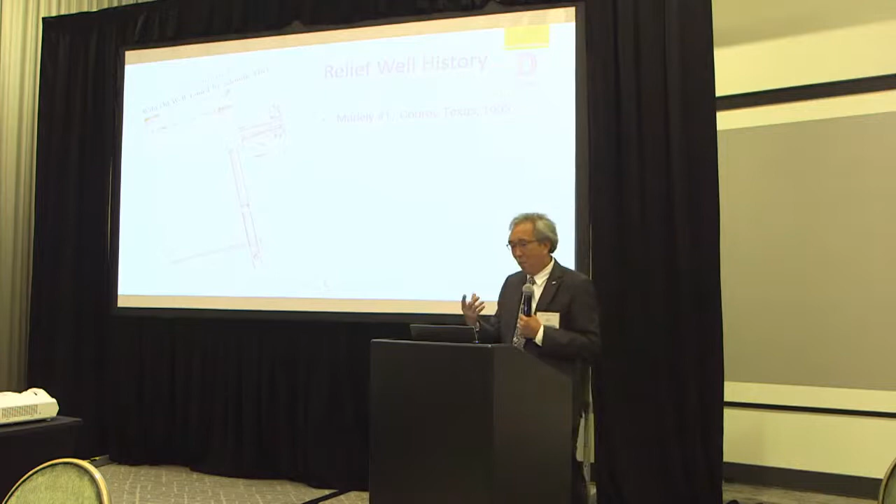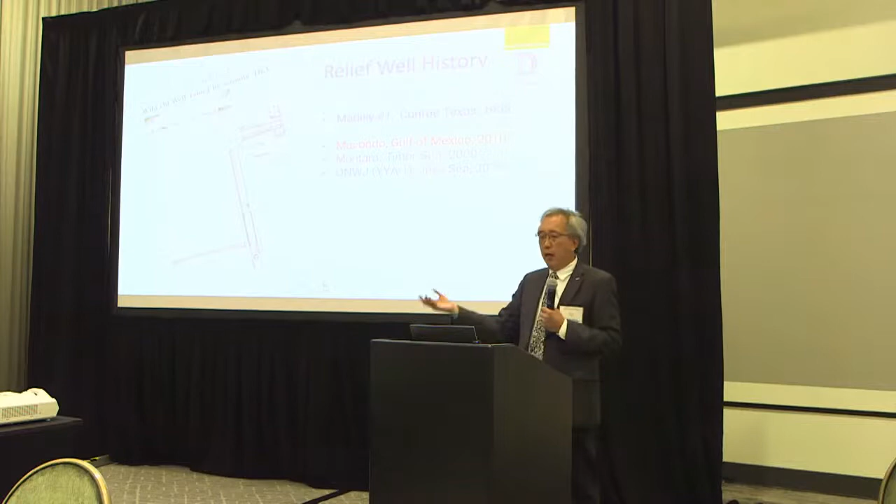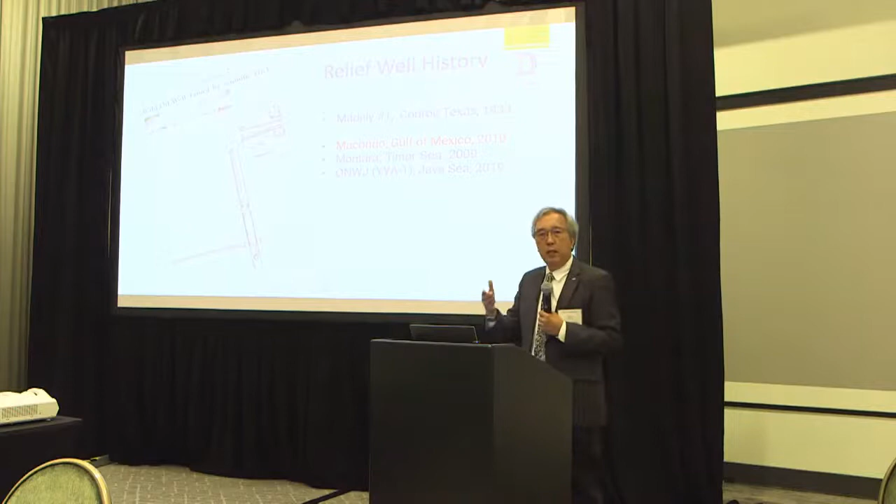Okay, the next one is happening in the Timor Sea, in Australia. This Montara is dealing with around 2,000 to 3,000 barrels a day, okay? They create a spill as well. And the most recent one that I know is in the offshore Northwest Java Sea, dealing with 200, 300 barrels a day. That's in Indonesia.

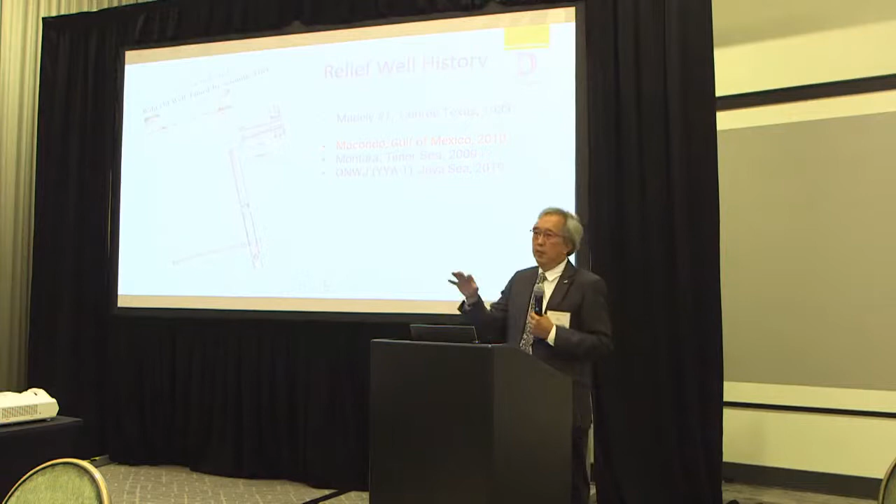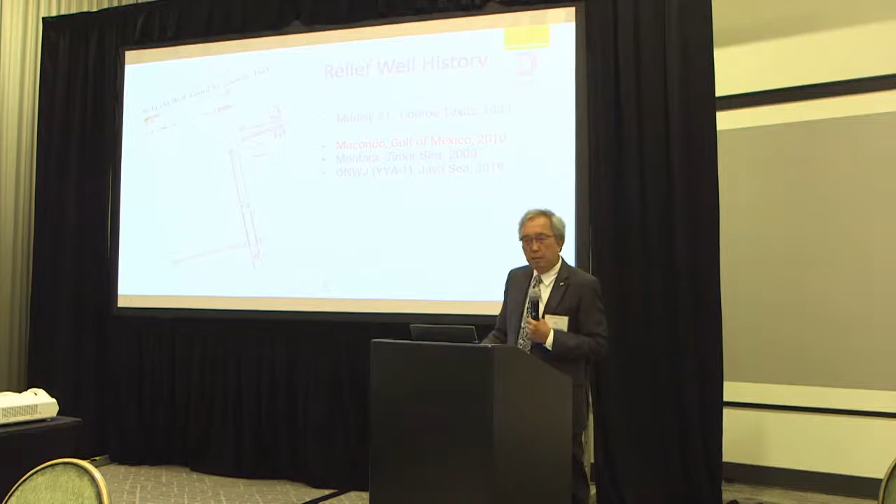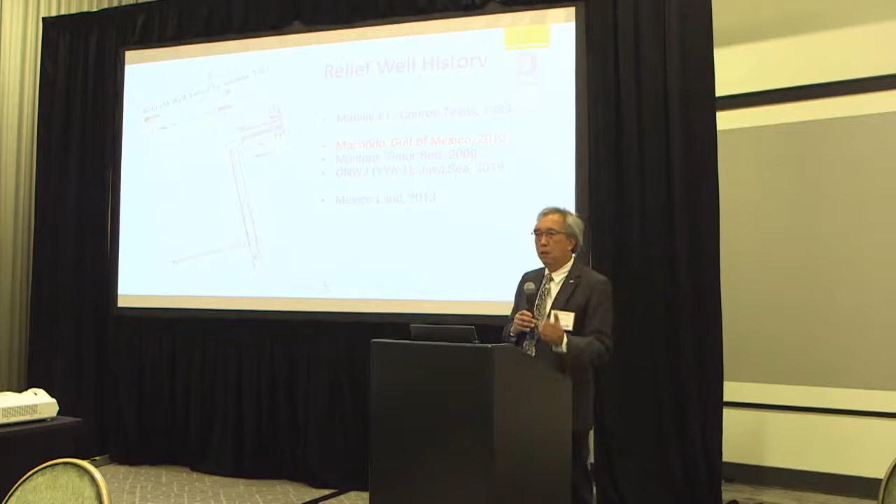And there are a couple of recent ones here and there, like in India. I'm sure some of you are aware of it. That's happening in the swamp. You have difficult access. And on land, it happened in Mexico in 2013, with a spill the same amount as Macondo. But on land in Mexico, they were able to contain it, and they flowed the spill directly to the production facilities. So in terms of environmental damage, it's very, very minimal.

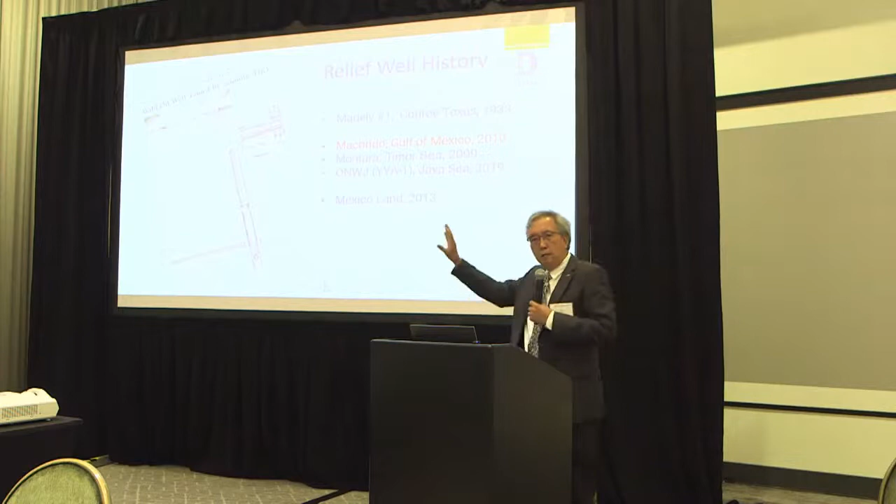Okay, I'm sure if it happened offshore, it's going to create a large spill. So what I'm showing you here is what's happening in the Western world. I call it the Western world, right? So let me just pitch a little bit what happened.

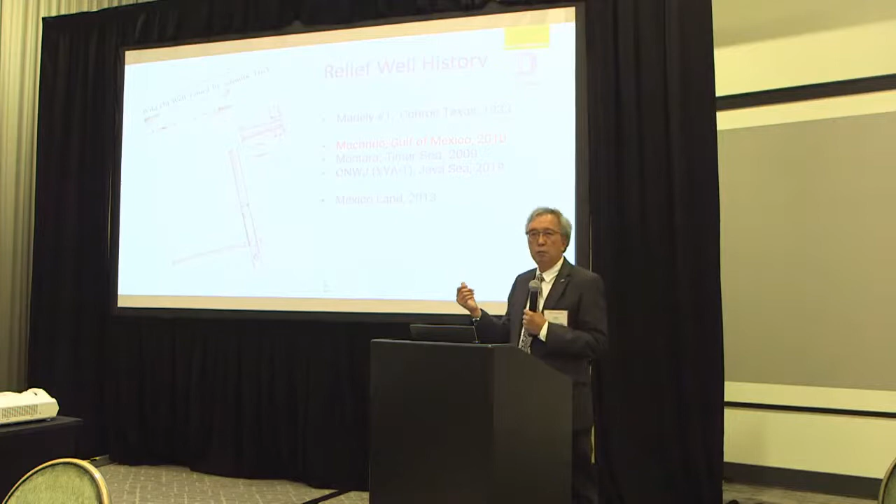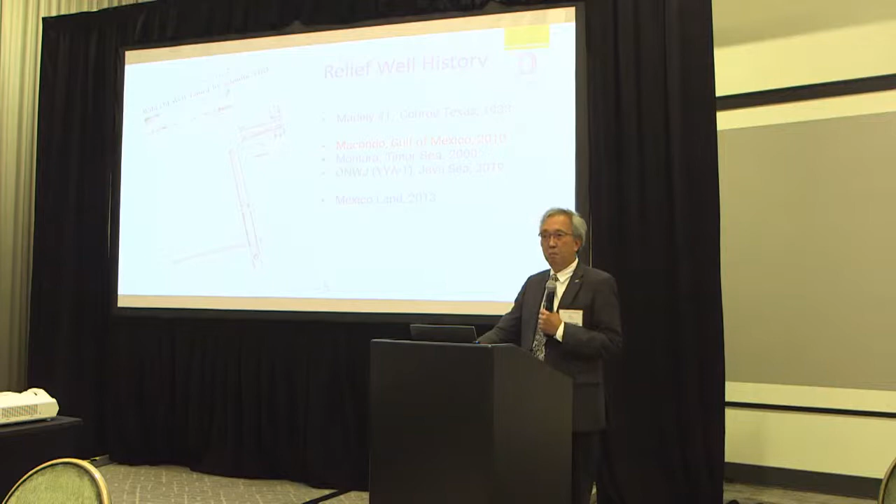Prior to 1967, documented in this Popular Mechanics edition, the Soviet Union used a nuclear bomb to put down a well that had been blown out for 3 years in Uzbekistan. And they did that to 8 more wells. So we have a different approach in what I call the Eastern world, right? Eastern Bloc and Western Bloc. So what I'm showing here is just from the Western Bloc perspective, not from the Eastern side.

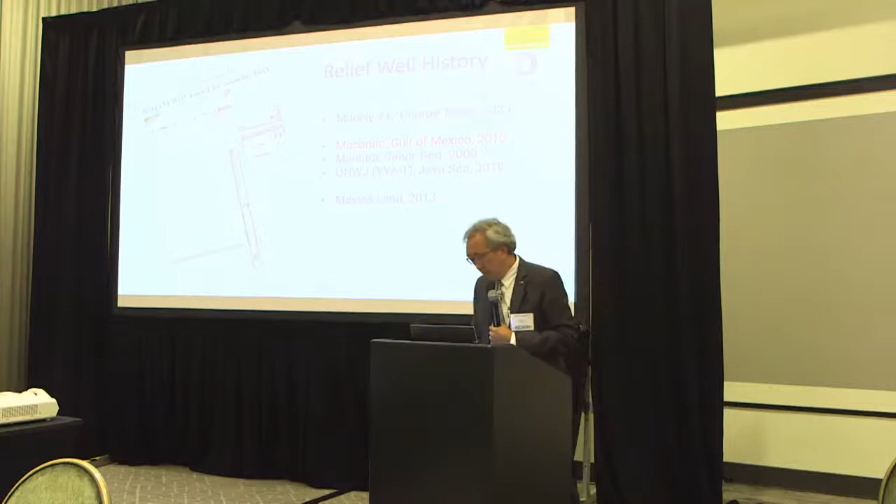So let's look at Macondo. I'm sure you are very familiar. You read the report. As I mentioned before, this is one of the largest, the worst disaster in the history of oil and gas. We lost 11 lives, and it created the largest spill, and then created tremendous financial exposure, especially for BP. As per public domain information that I gathered, it cost around 80 billion to date. So that's the cost to BP alone.

How about the rest of the service companies, the rest of the oil companies, the rest of the food chain? I estimate probably in the range of 40 billion. Again, this is just using my numbers, if you trust me. So in total for the industry, around 120 billion. So the point I want to make here, it doesn't matter whoever created it. We as an industry, if we can stop it, that's the best for all of us, right?

So the key lesson learned that I take from the report is the statement saying that if there was unwillingness to take excessive risk, this could be averted or prevented. The key is excessive risk. The report defines excessive risk as when risk and reward are not balanced at all. It means the reward is negligible compared to the risk that you're facing. If you keep doing that, the odds of it happening are very high.

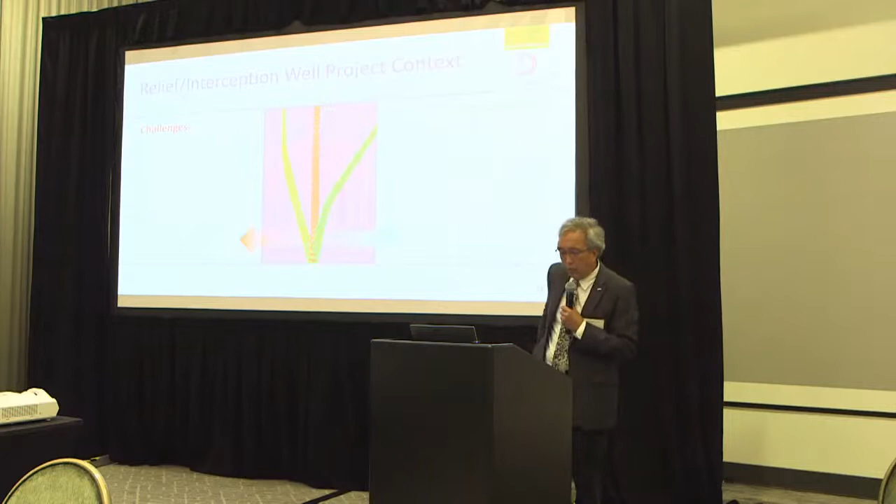In terms of the context of the project, as I said before, it's very complicated, very challenging. The challenges here are technical complexities, which means you need to have a team and people that can do the job.

The team requires multidisciplinary interaction, it's not based on one person's expertise. We need to have a certain protocol for how we communicate with each other in the workflow. Then the risk, the main thing, is to make sure we don't have any HSE risk, meaning the risk needs to be quantified. The way we quantify it is using hazard and risk control.

And then we have contingency because it's a very dynamic operation. The change of the plan from 1 to 2, or 1 to 5, is very dynamic - it could change in the middle of the night. So the way we do this, we have to have everybody on the same page. When we make changes, we use minimum communication - from 1, now we change to 5, something like that. We don't need to explain what it is because everybody should be aware what 1 means, what 2 means, 3 and so on.

In terms of the people, as I mentioned, it's multidisciplinary - we have technical and non-technical. Non-technical could be finance people, the CEO or CFO, and the technical one is the CTO. So we have to work all together. Any technical recommendation needs to be quantified, needs to be transparent, just to make sure the risk is minimal and not escalating to a higher level.

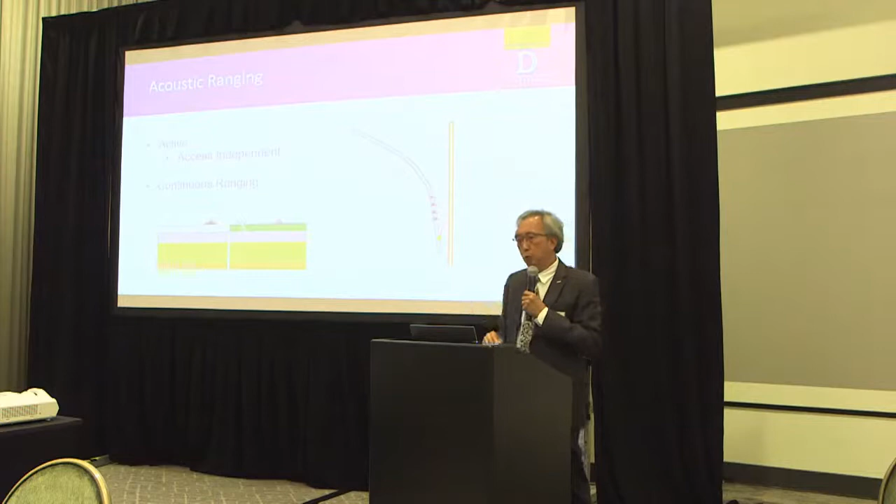And what I like to stress is, in any ranging you're going to do, you have to do what I call the modeling or assessment of the ranging performance. It doesn't matter whether you're going to do passive magnetic, active magnetic, or acoustic ranging - you have to do that as a contingency, so if something goes wrong you know what the problem is. That's the thing I like to really stress, the importance of doing the simulation or modeling to understand the operating performance.

And the other ranging technique that's come in recently is resistivity ranging. It's access independent, using LWD tool, done while drilling. We can transmit to the receiver, so the detection distance depends on the distance of transmitter and receiver. The good thing about the BHA is we can put as many receivers as you want. So let's say with 120 foot spacing, you can detect 60 feet. If you put 80 foot spacing, you can detect 40 feet, and so on.

So with this technique, we provide what I call redundant measurement, redundant ranging, because each receiver gives you data, and you have confidence in your ranging result. So we do that at the same time in the same BHA.

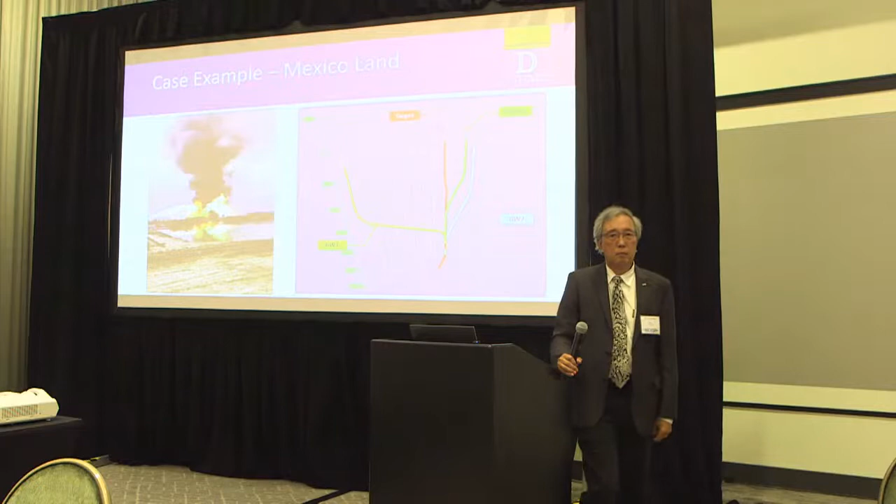And if we can do everything we want to do, if we have to, well, that's a pretty good contingency plan. But if you've got one shot to get it right and it might not work, well, that's not such a good opportunity. And then we do a risk assessment from there.

So that's an excellent approach, right? Bill, I really appreciate that. You go through all the options and you choose. And in some cases, for us, we've been parachuting there, and the well is just in front of you. So my thinking with the team is let's look at the good possibilities for success. You start from there, and then I start doing the downgrading. It's a different approach, I agree with you.

When you do what I call a contingency interception well, I don't call that a contingency relief well anymore, because when you say relief well, they will link it to Macondo. So I call that a contingency interception well, because it's planned to do that during the process. That is excellent. We did that with a couple of clients in the Gulf of Mexico.

We do the ranking, what technologies we use, trajectory. I think we create more than 1 million trajectories, 1 million tools. I just exaggerate, because we spend 6 months probably just to plan that, right? We have plenty of time when we do the contingency interception well. We have plenty of time. When the well is blown out there, you don't have much time.

Okay, because we are mostly a service provider. So they call us, they say, you need to do it now. Right? But if I have the opportunity to plan it ahead, that's the best. I agree with you. That's a good approach. You do that, do the ranking.